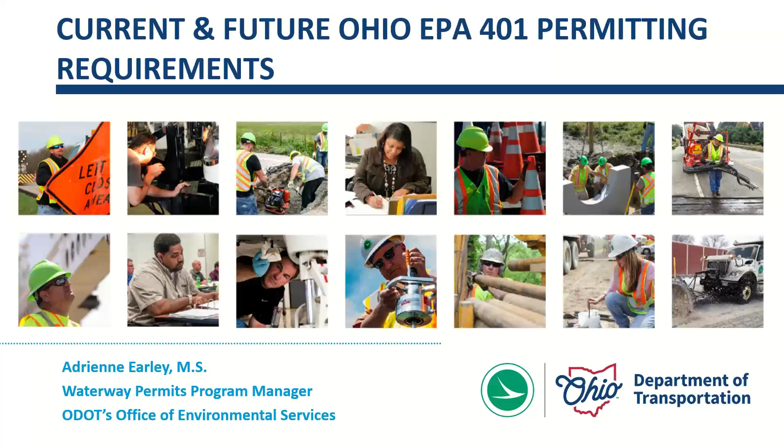Okay, so we're going to focus today on the nationwide permits, the 401 water quality certification requirements. And even within those, I'm going to specifically talk about stream mitigation and aquatic organism passage as it relates to culvert requirements. And then we'll move on and touch on the future, actually the near future, time flies, and 2026 is around the corner.

So we're going to have new nationwide permits in 2026, and we're going to get a glimpse into those. And then what helps give that glimpse is ODOT's regional general permit that is in the final stages of being reauthorized. And then finally, I'll wrap it up with some permitting tips and strategies.

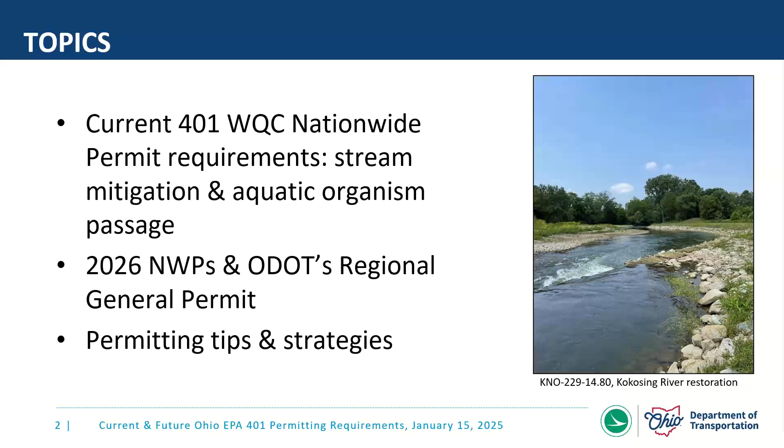First, real quick, I want to mention that ODOT has a funded position at Ohio EPA, and we regularly meet with them and have partnering meetings and work collaboratively with them. So we have a very good relationship, and that affords us a lot of collaboration back and forth being state agencies. So there are some things that we here at ODOT can have some insights into that other members of the regulated community might not.

Okay, so I know we have a broad audience, and I always have to throw this basic regulation 101 slide in there. But for those folks that don't live and breathe the Clean Water Act, this is just a quick breakdown of what the Clean Water Act looks like in terms of 401 and 404.

So section 404 of the Clean Water Act is regulated by the U.S. Army Corps of Engineers, and they're the ones that put out the general permits, and we're going to be talking about those nationwide permits, but they also will authorize any regional general permit. ODOT has one. Other entities can also work with the Corps to get those as well. And then individual permit approvals for the more significant projects.

And then as far as the state certification goes, that would be under section 401, and Ohio EPA regulates that part of the Clean Water Act. The states have the ability to either just automatically certify a general permit like the nationwides, or they can add additional requirements to those. So Ohio EPA has additional requirements, and those are the things we'll be talking about today.

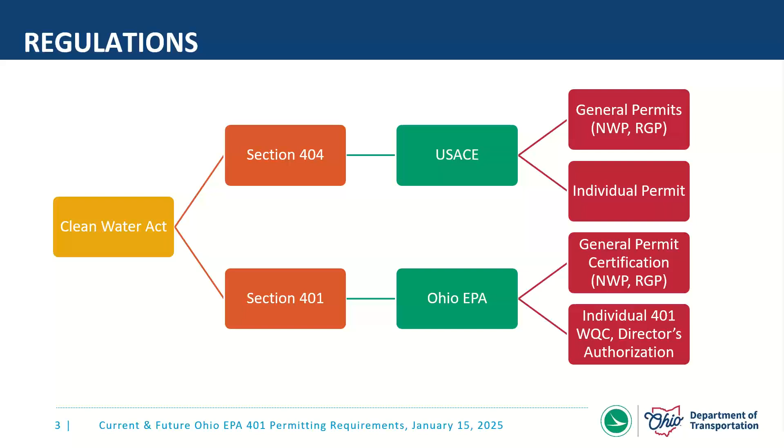And then also they authorize individual 401s and director's authorizations, but I won't be covering any of those today. But those are obviously for bigger impact projects.

Okay, so with the current nationwide permits, there's two sets of those, and they were authorized in 2021 and 2022. 2022 is the one that contains a lot more nationwides, mainly the ones that we use here at ODOT, or a transportation entity might use. So nationwide permit 3 or 14. So maintenance or linear transportation projects are the two main parts of the nationwides.

So within the nationwide permits, there are general limitations and conditions that apply to all nationwide permits. And mitigation and some of those culvert requirements that I'm going to talk about are under those categories. So Part G, Section C addresses mitigation.

And back in 2021, when the Corps published the current nationwide permits in the Federal Register, they changed the approach to stream mitigation from a linear footage approach to an acreage-based approach.

They actually never had a linear threshold in their rules. So this is the first time we saw that, back in 2021. And the 3/100ths of an acre found its way into the nationwide permits. Originally, they public noticed it with a bigger threshold, a bigger acreage for stream mitigation, and then it found its way down to the 3/100ths of an acre, which really is not a very large amount.

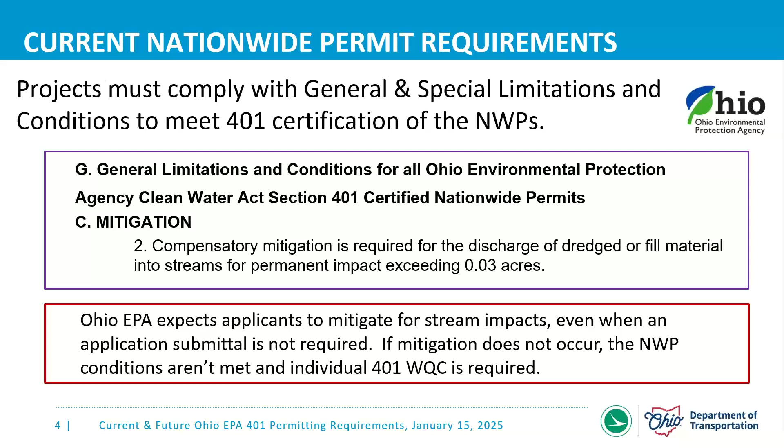So that's that. I just want to put that out there. I've talked about it in various other forums, environmental update meetings, and with our ODOT district staff. So if that's news to you today, I guess, surprise. All right, so I'm going to move on and talk more about the general limitations and conditions, and I'll come back to the stream mitigation topic.

So there's a section in the current nationwide permits under the 401 certification that talks about culverts and culvert requirements on intermittent and perennial streams. And essentially, this section is to ensure that culverts are installed in a manner that substrates and aquatic life and flows can pass through them sufficiently. And this is the current language.

So any culvert that's greater than 36 inches that essentially is not on bedrock, or where the slope would be less than 1%, the Ohio EPA would like to see those culverts bottomless or buried. And then additionally, they asked for the bankfull discharge to be able to pass through these culverts effectively, and that's approximately at a 2-year storm event. So here at ODOT, we were easily doing that. Our L&D manual, volume 2, took care of that.

So you can see some of the language here. They talk about when practicable. That's kind of a term that we would see. Maybe there are times where we here at ODOT kind of took advantage of that if it was or wasn't practicable, since that's somewhat of a subjective term. But really, Ohio EPA wanted to see these things occur when these conditions were met.

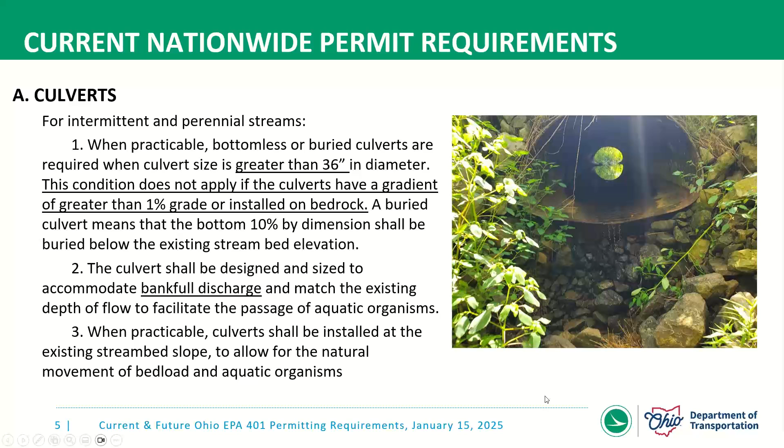Okay, so I'm going to move on and talk about what's coming. So the current nationwide permits, like I said, will be expiring in 2026, March 14th to be exact. So the Corps will initiate the reauthorization process sometime this year. Usually it's going to be late summer into the fall, and they'll put out a public notice document for review and comment, and there'll be a comment period. And then following that, Ohio EPA will initiate their public notice process. So be on the lookout for that, and the goal is to get the Corps' requirements and the Ohio EPA certification on or before March 14th of 2026.

I do want to mention that if a project is under construction, under contract, in advance of March 14th, 2026, the nationwide permits allow 1 year for those waterway impacts to be completed without having to get a new authorization. So that's a really great thing about the nationwide permits that ODOT's regional general permit does not have. So take advantage of that if you can.

Okay, so moving on to kind of what's going on here at ODOT with our RGP and looking into the crystal ball of the nationwide permits that are coming up in 2026. So we have gone through quite a process this go-around on our regional general permit to get this reauthorized. This is our 4th iteration of the RGP.

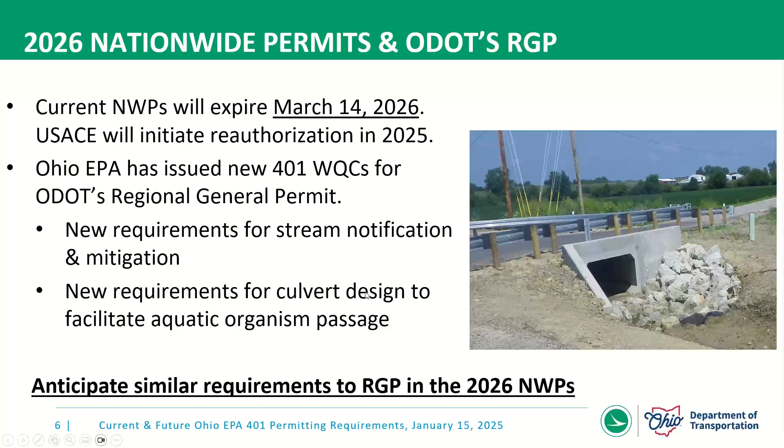Okay, so we now have a notification section in our regional general permit. I know that the nationwides also have that as well. So the nationwides require notification to Ohio EPA when you impact a Category 3 wetland, or you have impacts greater than or equal to 1/10 of an acre of any wetland, if you otherwise are not notifying the U.S. Army Corps of Engineers. So there are cases where that can happen, and mainly that's going to be under a nationwide permit 3, which is the maintenance.

Now, what is not in the nationwide permits is a notification trigger for permanent stream impacts exceeding 3/100 of an acre. So here's where this 3/100 of an acre pops up again. You know, this is not something we really wanted to see come out of this, but it's really the only way for Ohio EPA to ensure they're getting mitigation when it is required. So having a mitigation requirement, as I said previously, when there's no notification or mechanism for Ohio EPA to verify and enforce that, it really just doesn't make a lot of sense.

So, again, I don't want to speak for Ohio EPA or say I know this is a fact, but I would not be surprised if this notification requirement ended up in the nationwide permits in 2026. So heads up on that. Just keep that on your radar. They haven't specifically said that, but I would anticipate that happening.

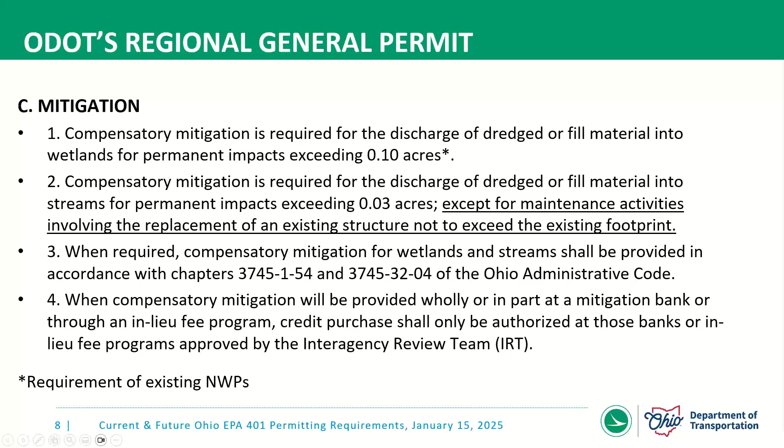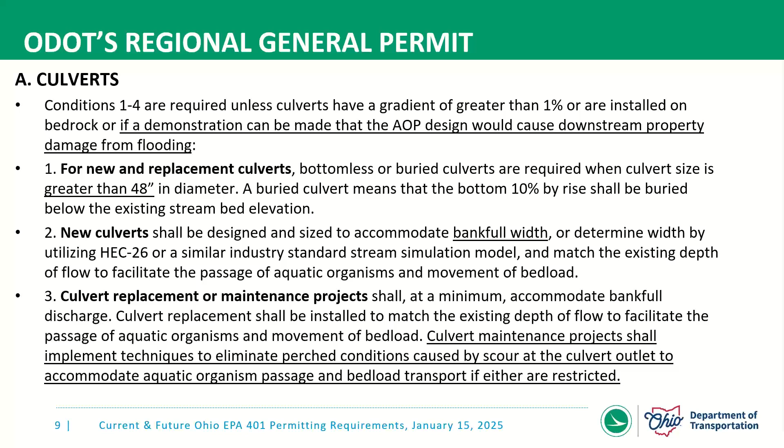It was previous slides back, but when you have those perched culvert situations where aquatic life is not able to effectively move through the culvert, substrates are not effectively able to move, and flows could be affected as well, they would like to see us address those, and we're currently developing ways to do that. We have not fully done that, but I believe it's going to be pretty basic, like adding substrate to fill in those scour holes at the culvert outlets.

Okay, so these last three items are pretty consistent with what's already in the nationwide permits and our regional general permit, or things we are already doing, but I just still wanted to include them on the slide. Now, all these updates, if you're working with ODOT on a federally funded project, are going to be in the July L&D Manual Volume 2 update. So look out for those. We'll be working with hydraulic engineering up until then to craft some language.

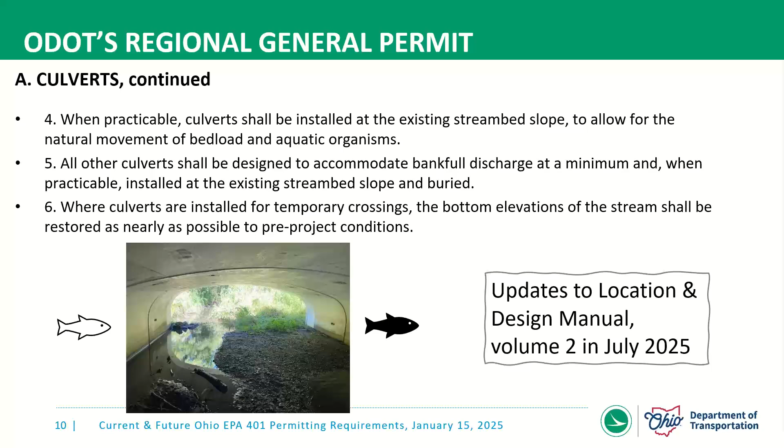We know this is a big change. We really worked hard to get something that is reasonable and practicable. It was a negotiating game without a doubt with Ohio EPA. So there was, I guess you could call it, a pretty good compromise between our agencies at the end of the day. So this is important to put on everybody's radar, like I said, because these requirements are going to be coming, specifically the culvert requirements in the nationwide permits in 2026.

Okay, so just wanted to mention some options out there for culverts specifically designed to pass aquatic organisms. We have only worked with one particular design here at ODOT. There could be others out there. I'm not aware of them, but this is an I-Series culvert. This particular one we installed in Portage County. We had actually installed two, and this was years ago, like 2018. And then this past summer, we did another one. It's designed by Contech. It was tested at Colorado State University. So it's a well-vetted design.

And Ohio EPA seems to like these because it encourages, like I said, a passage of aquatic life, natural substrates within the culvert. Even though it does have a bottom, there's kind of these interstitial spaces in between where the substrates can settle, but still continue to move through. So there is a connection with the stream bottom in these spaces, and it also gives different types of habitat for fish and aquatic life to live.

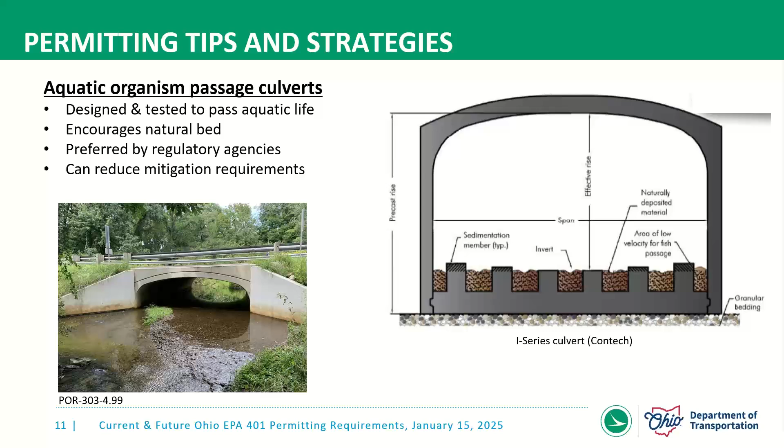Currently, it has functioned to reduce a stream mitigation ratio if that is required on a project. Our goal is to get it to fully satisfy stream mitigation when it is required for a particular crossing.

And finally, I want to mention some permitting tips and strategies related to everything I've talked about in the last 25 minutes. So when you are looking at your project, consider the existing fills, existing impacts when determining if stream mitigation is required. Now, I will say it's not spelled out that way in the nationwide permits currently, that you can eliminate that existing footprint like it is in our regional general permit. However, typically the agencies have not required mitigation when there's an existing fill there and you're essentially replacing that fill. So consider that when you are designing, developing, planning your project.

And then also, this is a little more of a proactive approach, but this is something we'll be looking to do at ODOT, is to purchase some advanced mitigation credits in more watersheds in Ohio. We already do that now, but I think we might want to spread it around a little bit more to hit these kind of lower impact projects where we might have stream mitigation.

And then if you have a culvert inventory, especially for those county engineers, getting a feel for the perched culvert situations in advance of projects, I would highly recommend. That is definitely on Ohio EPA's radar. It's also a requirement with the Corps as well that you do not have that condition in the field. And then, as I mentioned, these culvert aquatic organism passage designs, consider those. If you want more information about the I-Series, you can reach out to me and I can provide that.

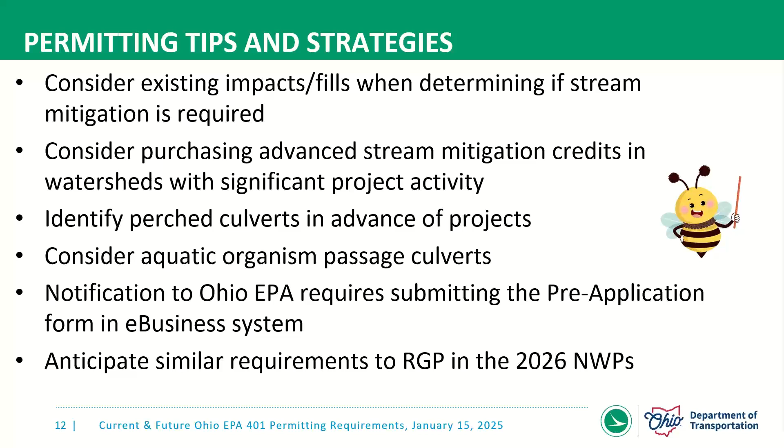And then finally, the theme of this whole quick webinar: anticipate similar requirements in the nationwide permits that we have seen in our regional general permit, that is going to be authorized here in the next month or so. They have essentially given us that heads up, and I wanted to give this group a heads up. I know there's a lot of different types of people on this webinar, but it's coming, and I wanted to make sure that you guys plan for these new requirements coming your way, because things are looking quite a bit different in the last year or so with the 401 requirements.

Okay, with that, that's it for my formal presentation. And I guess we have lots of questions. Yep. Oh boy. They're just rolling in. So we're going to start with the first one we received.

It says, how was the 0.03 acre limit determined? Well, that originated with the U.S. Army Corps of Engineers headquarters. So their requirement is if you exceed that amount and you're already submitting a PCN to the Corps, you have to mitigate. It wasn't necessarily a trigger to submit a PCN, but it's more of a mitigation trigger when you're already submitting a PCN for another reason.

Now, how was that determined? I refer you to the preamble of the nationwide permits to read about that. That's the best source. I don't know how satisfying it will be, honestly. The Corps takes into account a lot of public comments through their nationwide permit process. So I cannot give you a very great answer to that question right now. It started off as 1/10 of an acre and it found its way down to 0.03. So that's a pretty big difference. That's all I got, sorry.